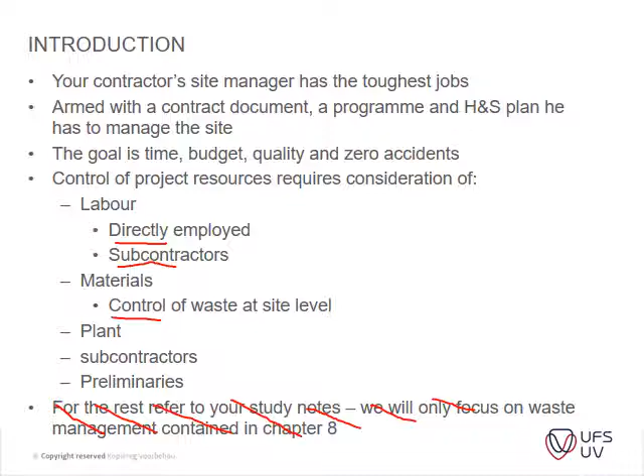So this is this little thing which I said which crept in. So please just ignore that. Yesterday when I updated the notes, I saw that this was in, so that's just something that crept in.

Okay, so labor control, like I said, you can either have directly employed labor or self-employed labor. In South Africa, it's not really self-employed labor, I think we've got a different term. We usually use labor-only contractors, guys that specialize in labor, which have the necessary insurance, and have their medicals updated.

UIF and all those items they look at, because you can imagine if you've got one or two projects and you suddenly have 100 people that you need to appoint, and then what do you do with them once the project is done? So that's where labor-only contractors come in.

But your directly employed labor is usually the contractor, contractors like shop fitters and so on. They have specialized guys that do the work for them. For instance, now that tender briefing that we went to, like for instance, tilers, plasterers, many of the contractors will have that type of core staff on their list, the artisans, bricklayers or so.

And what they might do is get a couple of casuals or people for that specific project to assist those artisans, guys that carry the bricks up to them or so.

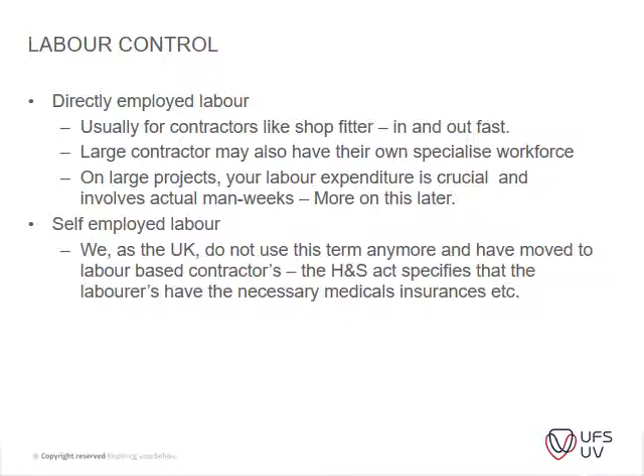Okay, so resource histograms - you did this in PPM, so I'm not going to go into too much depth of how your labor histograms work.

But what I may ask you guys to do for me - there's an example in this book that I might post as a mini task for you guys to do. But don't worry, I won't do it now. I'll just check with you guys when you have a bit of time.

When's your last tasks and tests due?

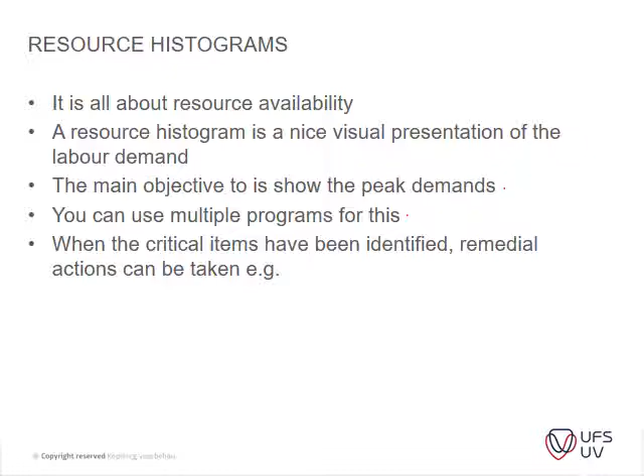When the critical items have been identified, remedial actions have to be taken, e.g. appointing more people, getting more machinery, or just letting the project run for longer. So that's the type of options that you do have.

So this one you'll probably recognize. This is from PPM from third year. I don't know if it looks familiar. It's a very simple histogram. It's a simple project where you have excavations, bedding, lay pipes, manhole excavations, manhole construction.

Install valves, backfill, test and commissioning. So it's a very simple little project, but this is now your labor only histogram.

You need 2 laborers in your teams that you can put on for trench excavation, so you've got 2 people that can work simultaneously at once in the trench. Your bedding, you can put in 4 people to work on that, and it takes them about 1 day.

And then you've got your manhole excavations, you need about this amount of people. Laying of pipes, you need 3 people to do that. And then you've got your manhole construction where you need 6 people, and so forth.

All it does is this is done on an Excel spreadsheet, and then you just add up the amount of people that you need per day. So the total amount of labor for day 1 is 2.

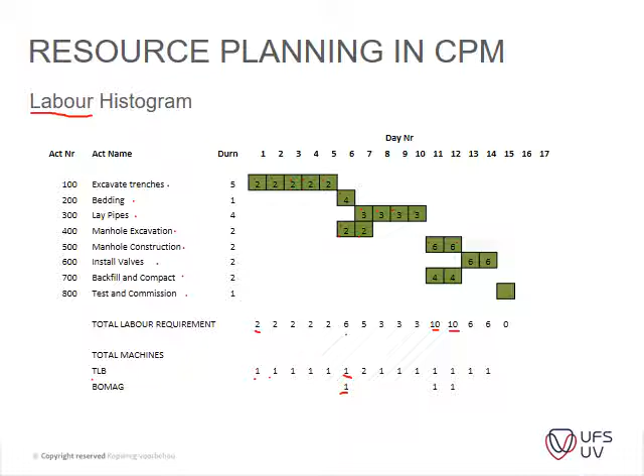So on your labor histogram, you can see we've got these 2 extremities here, but we know we only have 8 laborers available. So there's already too many laborers on that day. So you can see you need to do a resource leveling there.

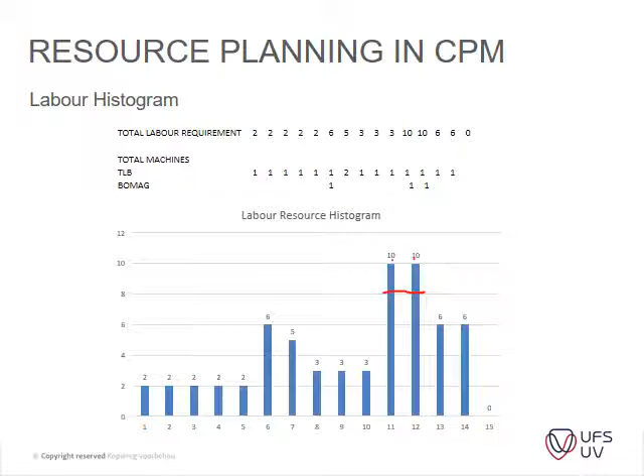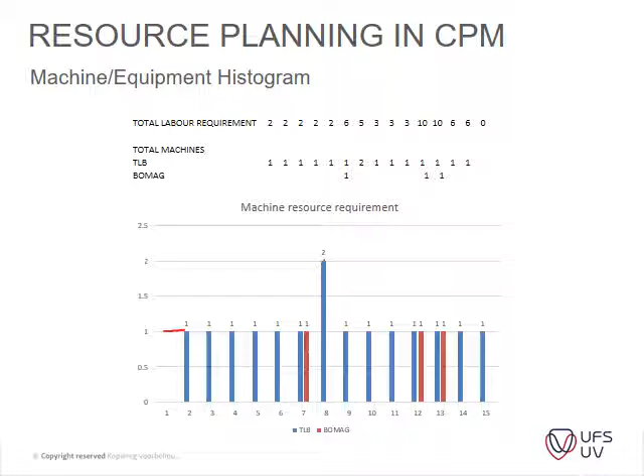Then with regard to the TLB, the same applies. You add it up, and you can see on which days you need what amount of machinery, and you can see on day 8 you actually need 2 TLBs, but you only have 1 available. So you can easily identify where you don't have enough resources.

And then the simple solution, without going into too much depth, is you just level out your resources and your TLBs, and what it causes your project to go -- I think it's the pipe laying that just moves out one day, and together with your excavations, which moves the project to 1 day if you level it, and if you level your laborers to 8, like there.

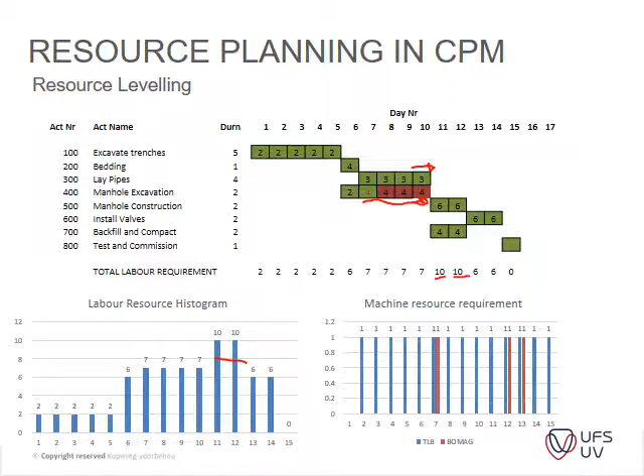I just want to see why it's still adding that up. Okay, so that's just a bit of a recap of how histograms work.

And going further into materials control, that is on page 401.

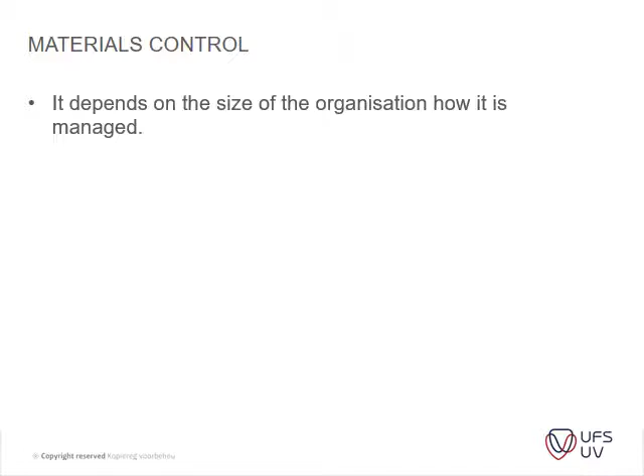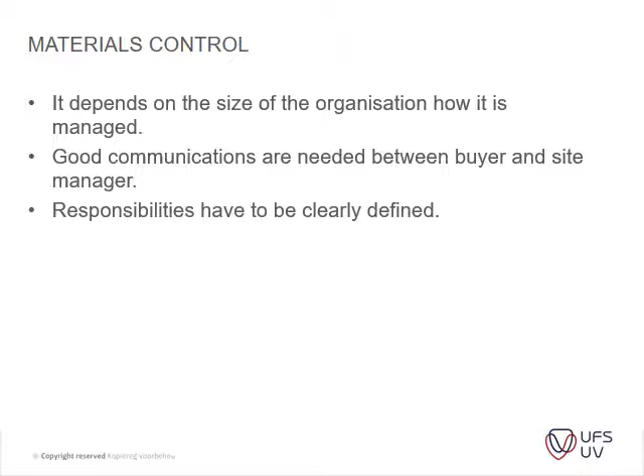It depends on the size of the organization how materials are managed, whether you've got a buyer, central buying division, or if one person does everything. Good communications are needed between buyers and site manager. That's very crucial, and the responsibilities have to be clearly defined. Once on site, it's the responsibility of the construction manager to coordinate the communication.

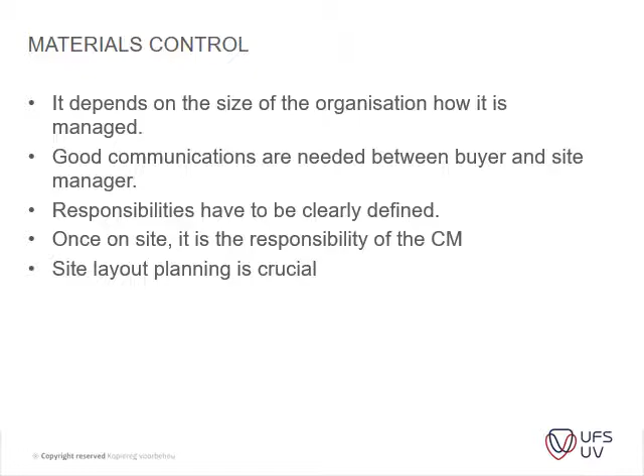Site layout planning is crucial - that's where you decide where to put your plant and where to store your materials. If your housekeeping on site is done well, if you come onto a site and everything is nice and neat, you know they're managing their materials well. If you come onto site and you're falling over debris and broken bricks, you know they're not managing their materials very well.

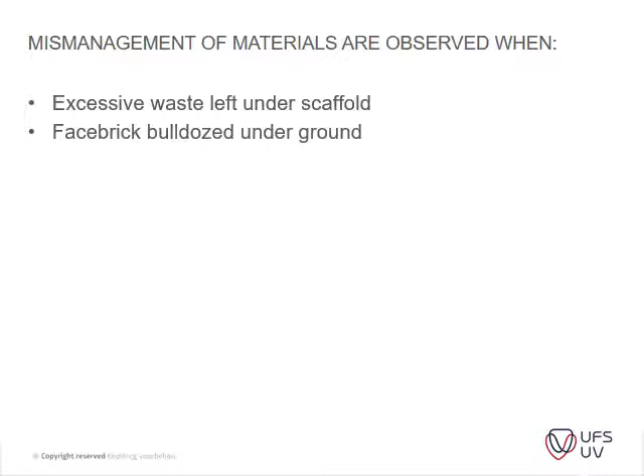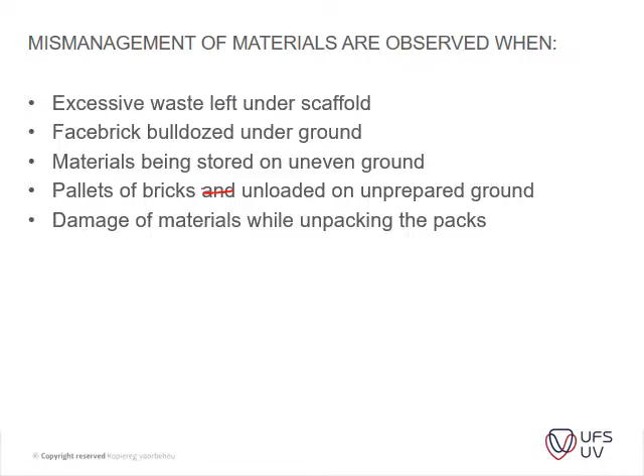Excessive waste left under scaffolding - here are some examples you can see: excessive waste under scaffold, face brick bulldozed underground, material being stored on uneven ground, pallets of bricks on unloaded or unprepared ground. Also damage of materials while unpacking, roof trusses stacked on unprepared surfaces, lack of covering of material, excessive material, out of sequence work, not preparing properly. You can easily see when a site is not properly run, especially towards managing of materials.

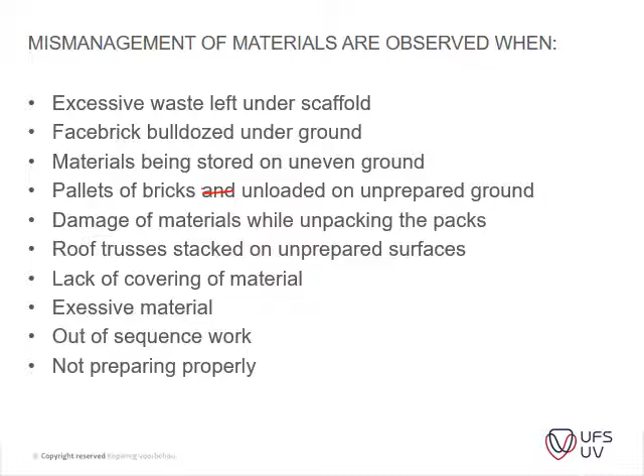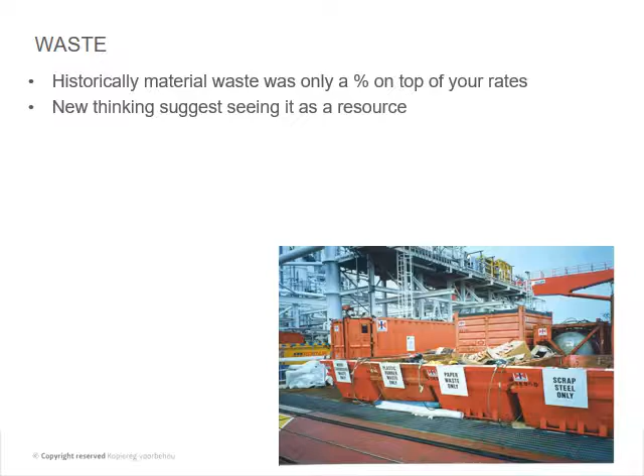Something which relates to that is waste. Historically material waste was only a percentage on top of your rates, but these days, if you're working on large projects, that percentage can be a lot of money in your pocket or a lot of money lost. So it's something you need to manage very well. New thinking suggests seeing it as a resource - the industry can benefit environmentally, on performance, and on the bottom line.

Demolitions amount to about 100 million tons per year - that's in the UK, so it's quite a lot. Waste removal accounts for 4.5% of a company's profit, which is quite a lot - if you're working on a million rand project, that's more or less 45,000 rand which you could have saved or put into your pocket. Then approximately 13% of all material delivered to site is wasted - that's a staggering amount, and that's just the waste of material.

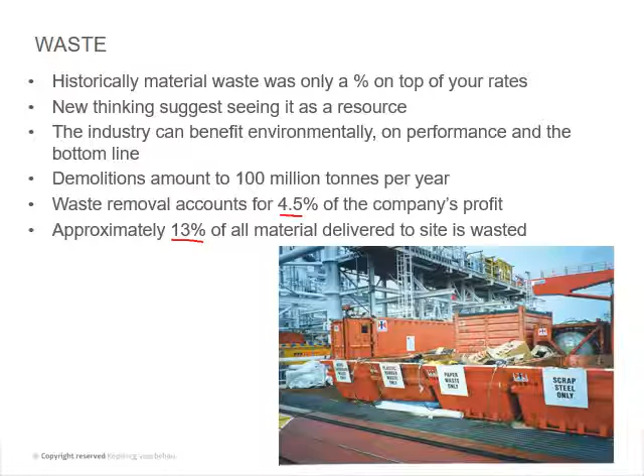There are other items you can manage well too, like your site offices. If you manage your tools, sheds and so on efficiently, the less containers you have on site, the less your overheads per day. Also, if you plan your site such that you use part of the original constructed building as storage, you can save that cost as well. There's a whole lot of practical items you can think of to save money by utilizing your progress on site and just being effective.

Duty of care means construction and demolition waste streams have been prioritized by the environmental agency. Once you've demolished something, you need to get it off site - you need to plan for it, that's the short and long of it. You can't just demolish something without a plan of how to clean your site. Waste streams should be managed safely and without risk to human health. The waste may consist of metals, asphalt, concrete, brick, tiles, etc.

There's actually money to be made out of some of these demolitions. Sometimes you can sell your hardcore, or some of your demolition material, for use as fill in other areas. If you've got a contractor that needs a lot of fill and can use that demolition material, you can actually sell it to them. So remember, don't just pay money to dump it at the nearest site - you can actually make money from that.

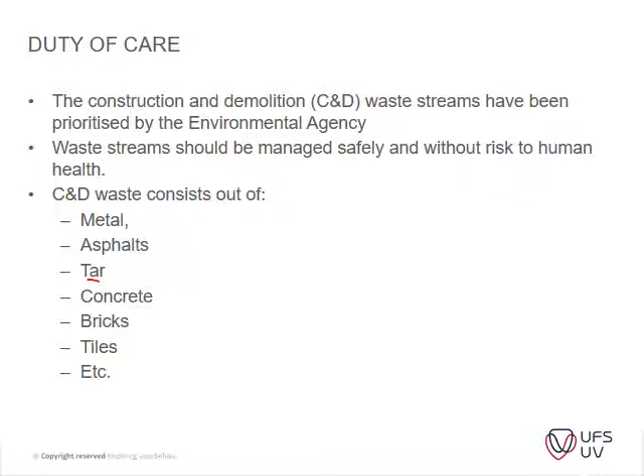Like for instance, your tar waste you can reuse for other applications. I know in Kuruman they use tar sections because of the asbestos there on some of the gravel roads - they just use some of the excess bitumen and made a little layer on some of those areas to rehabilitate it so the dust doesn't fly up. So that was one example of items you can reuse.

Okay, duty of care. Construction and demolition waste is normally classified as commercial or industrial waste. Hazardous waste, which requires pre-consignment, is for instance your asbestos, chemicals, oils, contaminated soils, and so on. I've worked on one project where we had to take off asbestos. It's a schlep, there's only about 4 contractors in the country that does it, so it's highly specialized work, and they usually ask a lot of money for it. So as soon as you're doing the pricing on a project and you see there's asbestos, immediately start asking questions: is there enough money allowed for it? Identify it as a risk whenever you're pricing your documents.

Okay, then we have a legal duty of care. If we know that we're going to work with asbestos, the other risk is exposing your laborers to that. It might not be that your personnel pick up a little strand of asbestos on that specific site, but 5 years down the line he gets asbestosis, and he says, oh, on this project I worked on, that's probably where I got it, even though it might be that he got it from somewhere else. So just see that in that light. You've got a duty of care to actually look after your personnel's health.

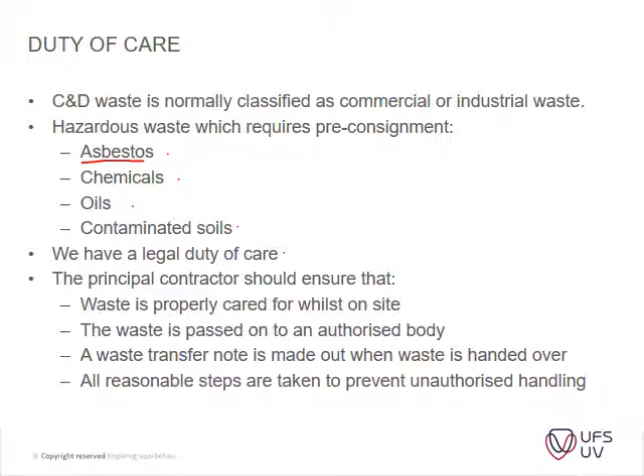Okay, then the principal contractor should ensure that waste is properly cared for whilst on site. Waste is passed on to an authorized body. A waste transfer note must be made out when waste is handed over. All reasonable steps are taken to prevent unauthorized handling.

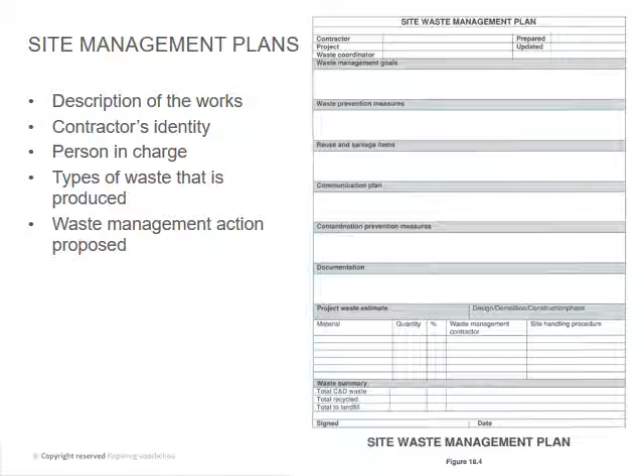Okay, site management plan. Here's a nice example that you guys can use: description of the works, contractor's identity, person in charge, type of waste that is produced, waste management action proposed. So pretty straightforward that you guys can have a look at.

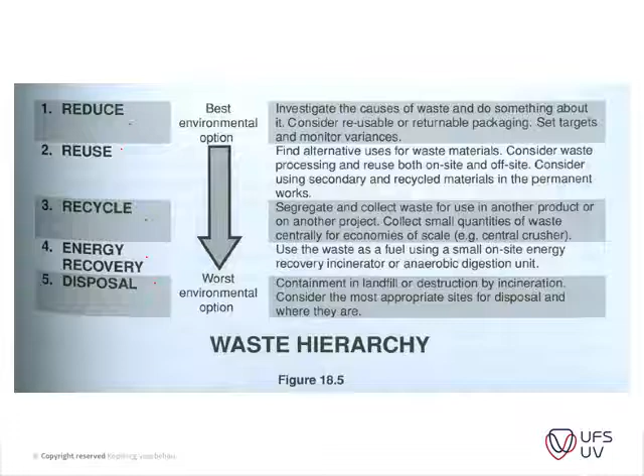Okay, a waste hierarchy. So you guys can also just look at: waste can either be reduced, reused, recycled, energy recovered, or disposed of. So that's also a nice little question to ask on waste, and obviously you need to explain what each one is.

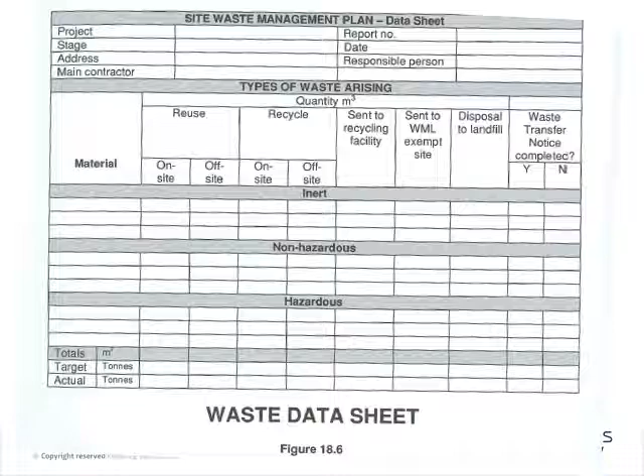Okay, here's another example of a waste data sheet that you guys can make a mental note for the industry. If you do get onto a site and for some reason you have to have an environmental management plan, copy and paste this into that.

Okay, then site waste management strategy. This is also nice to have, you guys. I'm not going to go into this too much, you guys can read this. This is also important for the industry more than really for the subject. If I do change my mind and include it somewhere, I'll definitely let you guys know. But for me at this stage, you can read through that. It is a nice summation of the waste management section, so it's basically a summary of what we've done now. There's a couple of things there, but it's not too important for me.

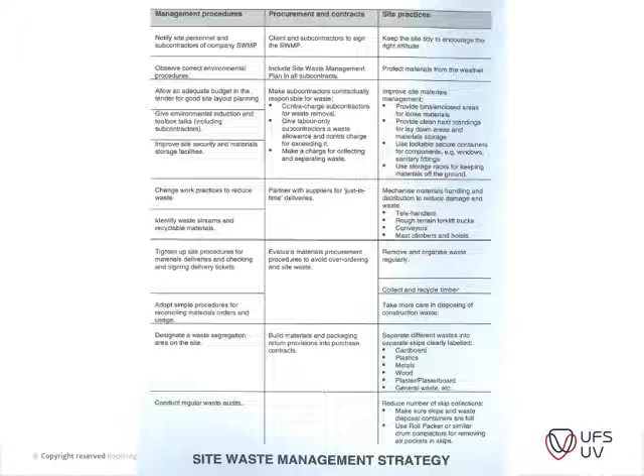Okay, then improving your management of waste. Managers have to be proactive in planning and managing materials ordering, delivery, handling, and storage of it. Waste is caused by design waste, takeoff specification waste, delivery waste, and site waste. Waste management should be integrated with everyday thinking, and it will have a positive impact on the contractor's profit margin. Materials have to be managed properly. Incentives to managers have to be put in place, along with company materials management policies, etc. It will prevent health and safety problems as well.

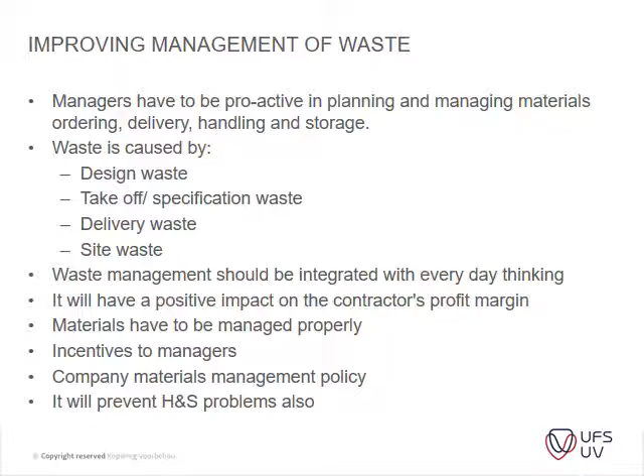If it's a large company, usually those guys have to be on their vendor lists. So if it's something specialized, then they've got a whole lot of red tape to actually get quotes from other guys and get them onto their registers and stuff.

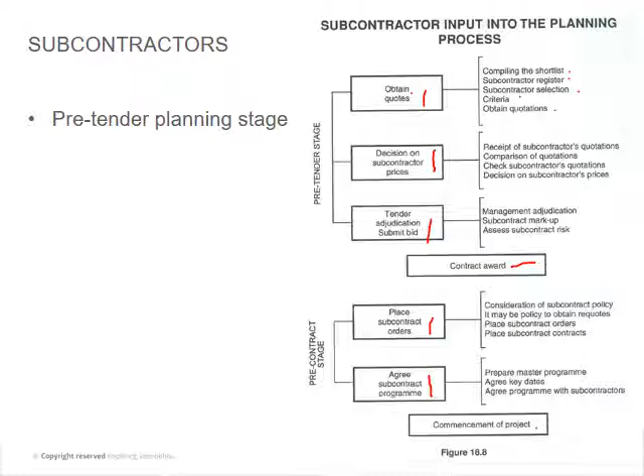Instead of submitting tenders, if it's a large tender, the main contractor will have tenders going out to their subcontractors. But for smaller or medium-sized contracts, they get quotes for certain things. It's like a selective process, the contractor selects their own subcontractor.

This is also very important, the information contained here. You'll see in your books there's a whole lot of checklists, just read through that. But the most important items are actually contained in these figures. Going back to my rule of thumb, know the headings, and then you can build on that. In Afrikaans: ken jy opskrifte, gorrel die res. But the main thing is, if you need to gorrel, you need to understand.

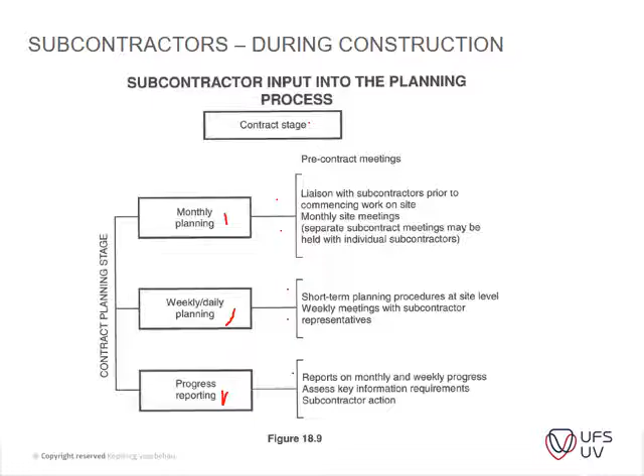Subcontractors continued. These days, subcontractors may be responsible for their own program. For instance, at Amelia where we worked, the plumbing contractors had to submit their own program, and that had to slot in underneath the main contractor's program.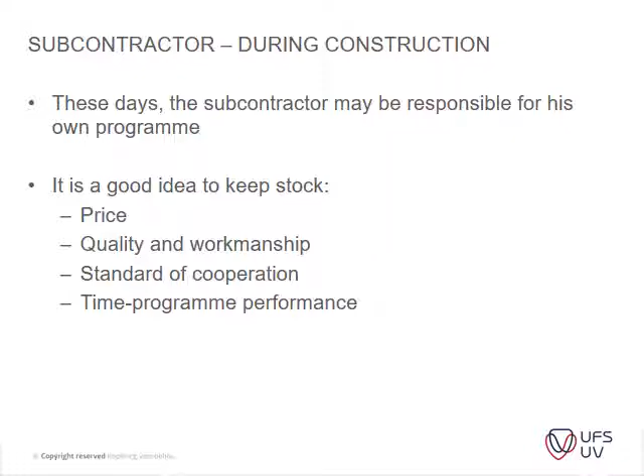It's a good idea to keep stock of the price, quality, and workmanship, standard of cooperation, and time program performance of subcontractors. I know guys who, with vendors and subcontractors, actually have a scorecard and a rating system, so the guys can move up and down, and that's usually very confidential information. In large companies this is crucial, because if you're working on large projects and have to evaluate a lot of subcontractors, you look at their ratings for this guy in this area and so on. So it does become quite complex.

Just an example, I think we've touched on this. It's not that important for me, but there's the work package master program, package stage program, and then a work package 4/6 week program. It's just going into more detail, so it's not too important for me.

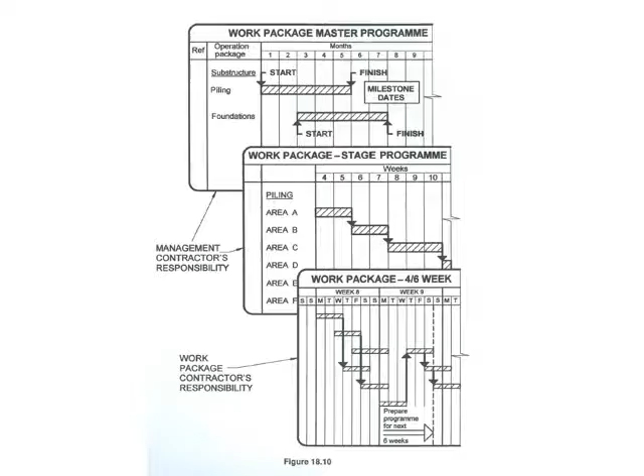What's liaison in Afrikaans? Correspondentie. What does it mean? Liaison is basically working together. If you liaise with someone, you speak to them, communicate, and do stuff together.

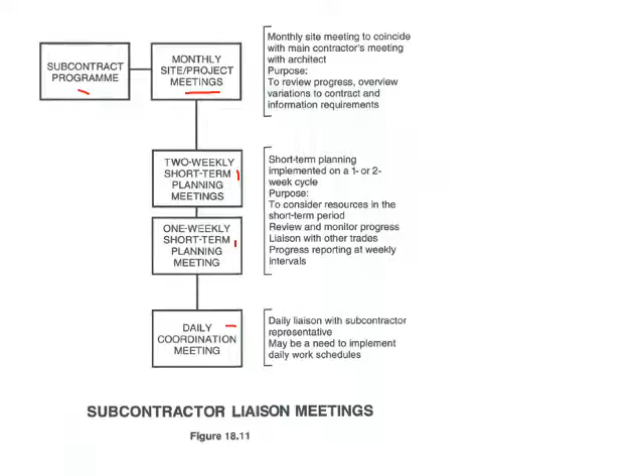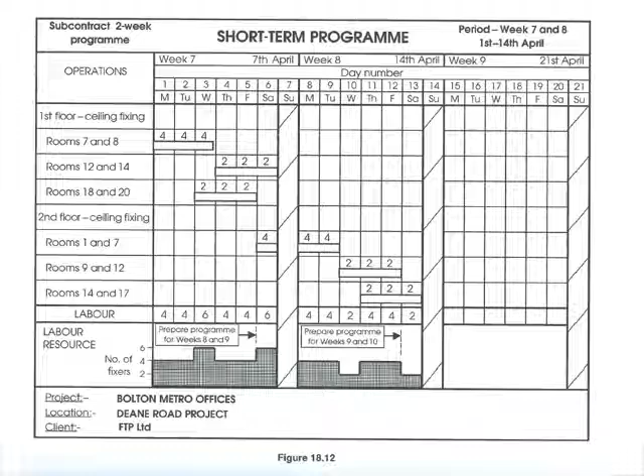Then the last one is the short-term program, just another example of that. That's also not too important, we're going to do programming later on. Next semester we're going to do programming in detail, so we're going to cover all these areas. And that's it.